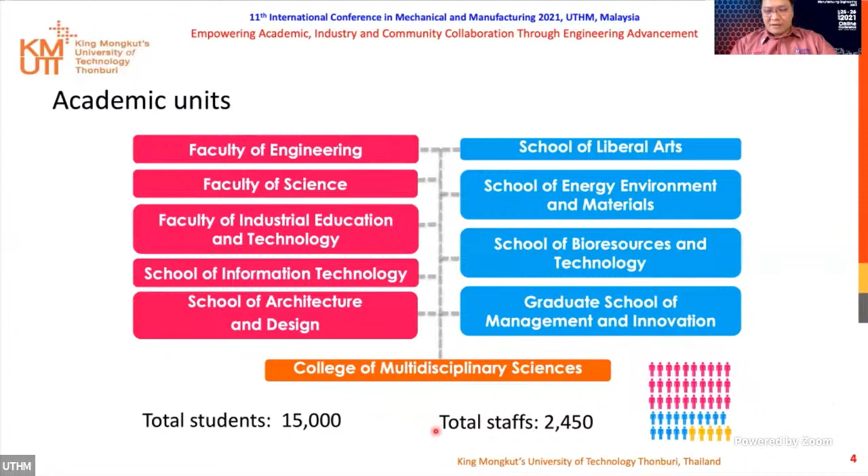Okay, then let me jump into the Faculty of Engineering. The Faculty of Engineering has our own vision: using engineering excellence to enhance society's capabilities. This is our strong commitment to serve the nation.

Within the faculty, we run the administrative office of the Dean together with three strategic centers to drive our mission. The Center of Active Learning in Engineering Education is taking care of the new teaching scheme. The Center of Promoting Research and Academic Outreach facilitates all of our academic staff and researchers to reach out and get funding from outside the university.

We are seriously focusing on international activity in our faculty. That's why we have one special center, the so-called ICE, International Center for Engineering, to take care of all those international activities.

We have a total of 229 staff, including 9 professors, 70 associate professors, 84 assistant professors, and 70 lecturers. The number of 163 researchers is also a very important workforce in our faculty.

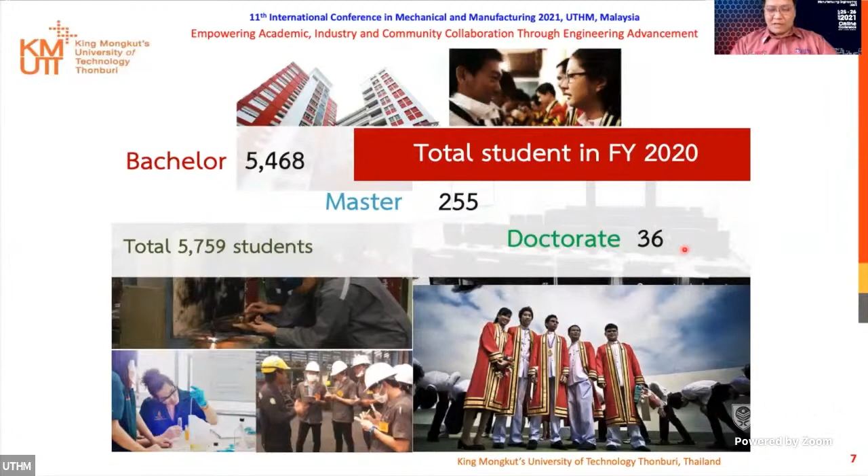This is the total number of our students in fiscal year 2020. We have more than 5,000 students. Most of them are bachelor students: 5,468 students, plus 255 master students and 36 doctoral students.

The most related resource to empowering academics to work with industry is strong collaboration. We have our own faculty-level MOUs directly with 45 companies. This is the work that I myself take care of, dealing with all those companies. We are planning to increase the number of MOUs by 10% every year.

For our nation, the government has specified 10 strategic trends of science and technology as our nation's issues. I believe we are sharing some interest between countries. For example, the next generation automotive, smart electronics, and aviation and logistics, robotics.

Today, my talk is related to this strategy. It's a medical hub. We've been going well with the work before COVID-19 exploded.

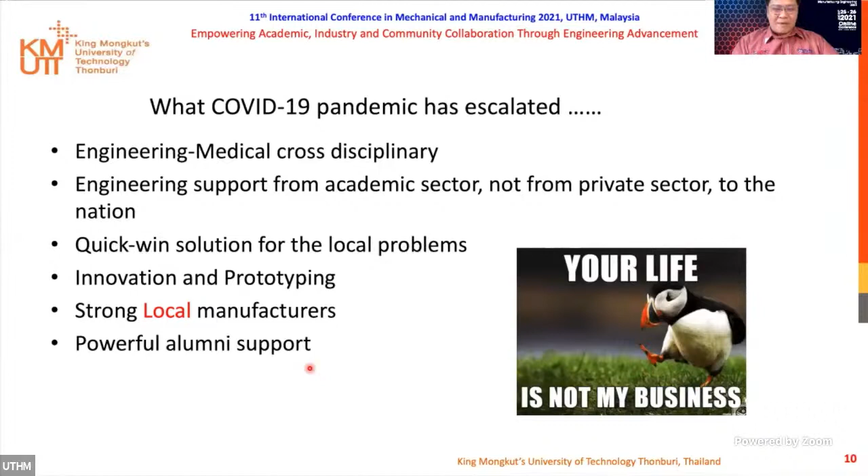As I said, you can try to look for help from overseas business in your country, but in our case, it's not really work. And unbelievably, one factor, powerful alumni support, is an important factor that maybe we don't think about.

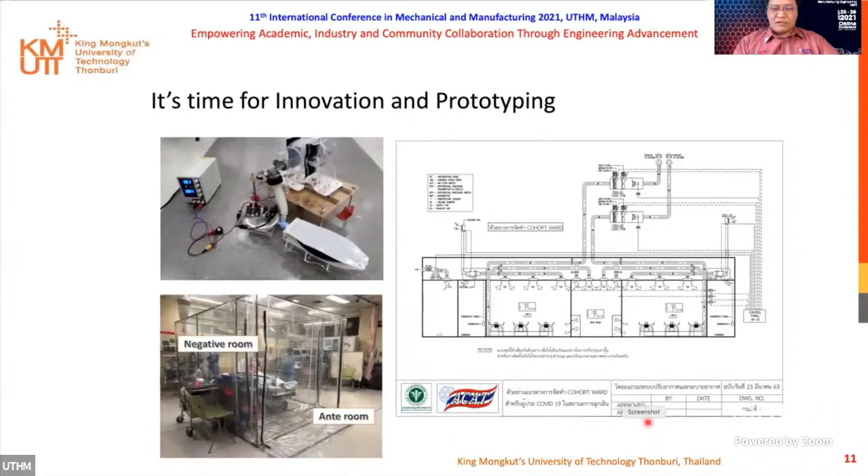In this slide, I just show you the development of the conceptual design of the cohort ward, that is KMUTT working closely with Saijo Denki. So we designed the concept of the urgent cohort ward. We did a review of the standard design, CDC, WHO, and NIH.

We also have the healthcare unit design standard in our nation. So the cohort ward should be negative pressure, and the airflow should be arranged in a specific directional airflow. The clean air should supply in the hallway where the nurse and doctor will walk along this path.

And the patient lying on the bed, at the head direction, we will have the exhaust system to suction the air, the dirty air, out of the room. And the mass flow and volume balance of the supply air and the exhaust air should be verified.

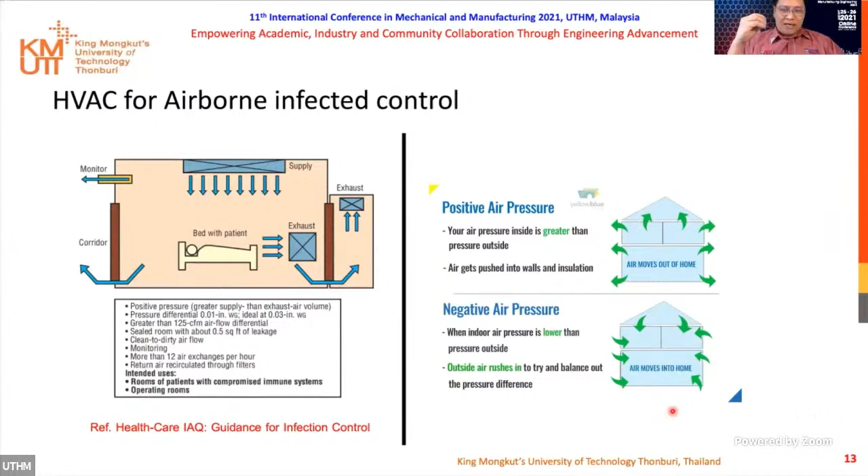So our design with Saijo Denki has actually been developed to renovate the urgent ward of the hospital. This is about the display of how we actually build, or renovate, the room in the hospital - we call it AIIR, the airborne infection isolation room.

So it should be fresh air 100%. It means no recirculation air. The new supply air will always be put into the room, and the exhaust air should be treated before letting out to the ambient - we treat it with the HEPA filter.

So the air change is one important key to dilute the concentration of the contaminant in the room. The directional airflow should be designed case by case. Actually, in our study, we need to survey the on-site first before we design the directional airflow.

The temperature control should be within 20 to 25 degrees Celsius, and the humidity control as shown in this diagram will be good for the condition that protects the growth of factors like bacteria, fungi, virus. So they recommend the humidity should be controlled within 40 to 60% relative humidity, and the pressure of the room should be negative, less than 2.5 Pascal.

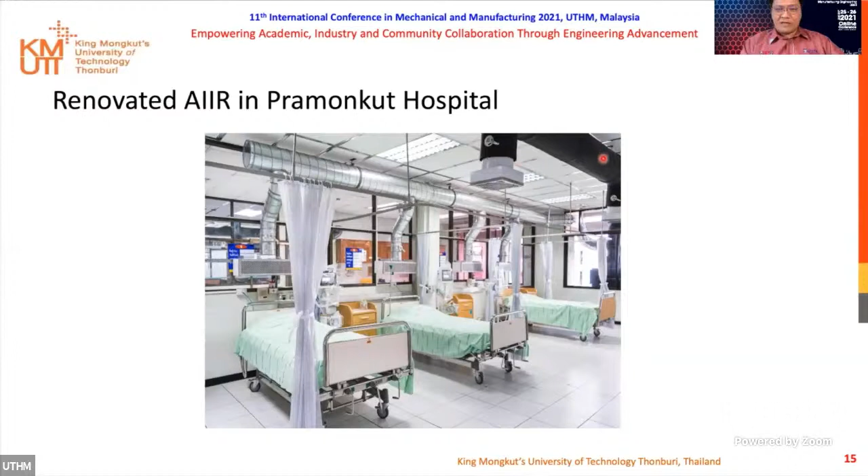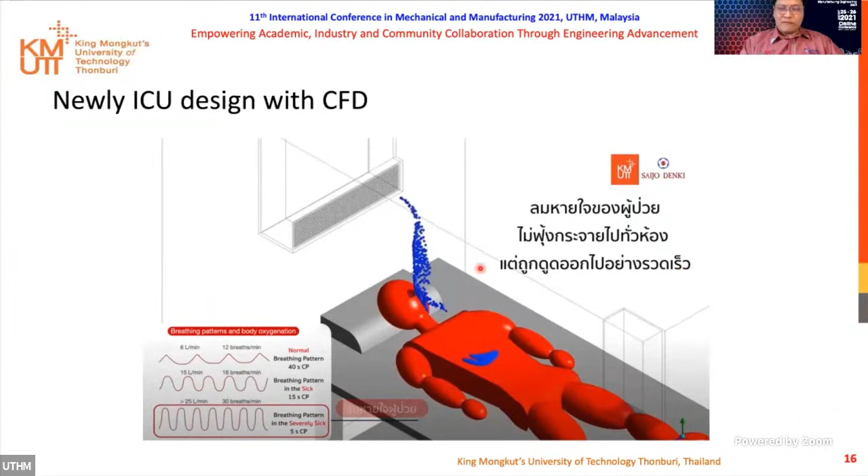So we then worked with the company, with KMUTT support, for the CFD computational fluid dynamic design to help the company design the new ICU. We also took parameters from the human breathing cycle to design how high and how large the exhaust plenum should be to efficiently remove airborne infection.

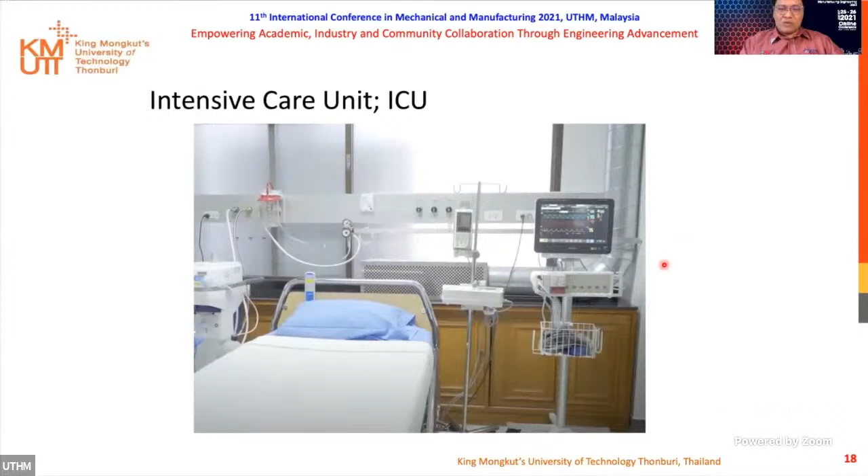Next, we moved to design and help the hospital renovate the OR room, the operation room. As I explained before, the operation room normally should be designed as a positive pressure room.

But in case the OR room is used for COVID-19 patients, negative pressure should be applied to protect the doctors and nurses working in the room, and also to protect against airborne infection escaping from inside the room. So we also used the CFD technique to help the company.

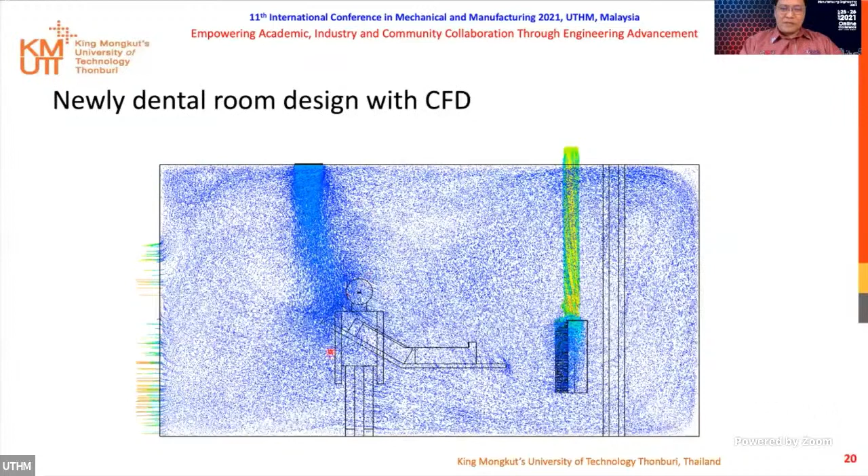We designed the dental room, because dental rooms normally generate a lot of aerosol. So in this case we used CFD to design the new directional airflow from clean to dirty. This is the exhaust ducting, this is the dental bed, and this figure represents the dentist.

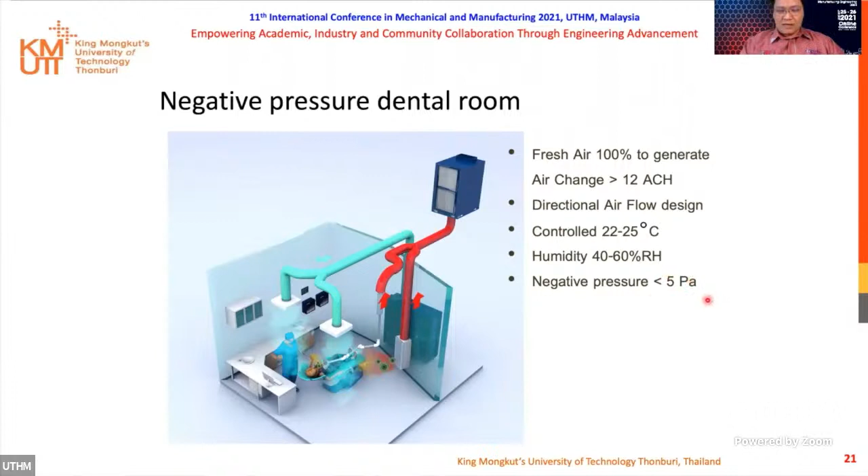For the negative pressure dental room, we need to apply a much higher air change rate than other rooms, because the dental room is normally very small, so we need a very high air change rate. Directional airflow again needs to be designed specifically using the modern CFD technique, and the negative pressure should be controlled at less than 5 Pascal.

This is the latest development this year, as the number of infected people in Thailand increased. We needed a modular ICU to be urgently built, so we collaborated with SCG, a very big company, to fabricate construction and building materials. They could design and construct a modular ICU for 10 beds within 7 to 10 days.

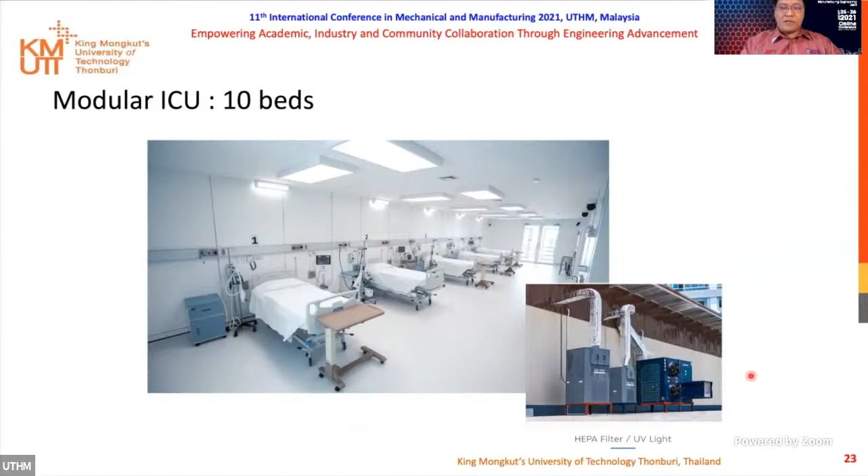This is much of our progress from June 2020 to 2021. We expanded more than 2,000 hospital beds in a year, renovated AIIR ICUs in 9 hospitals across the country, fully renovated 3 OR rooms from conventional to specifically applicable for COVID-19 patients, completed more than 100 negative pressure dental room renovations, have 8 hospital ongoing projects, and have already done 5 cross-disciplinary seminars between HVAC engineering design and real-case operation of healthcare units presented by medical doctors.

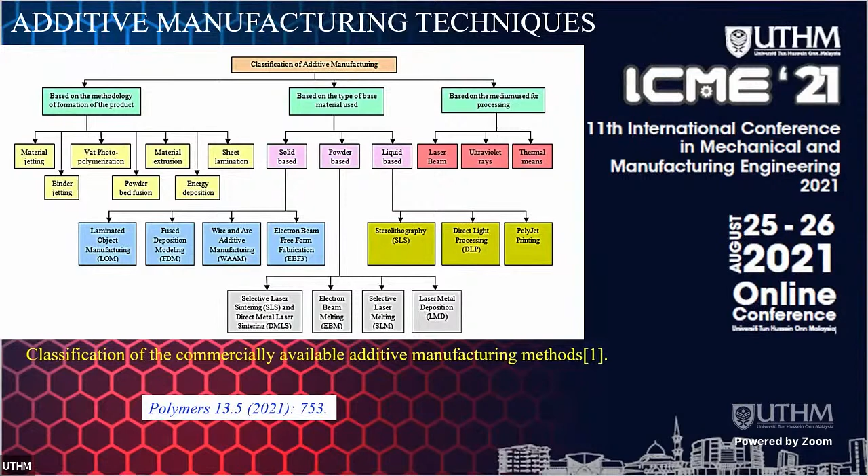The main companies in the global additive manufacturing market are as follows: Stratasys, 3D Systems, Arcam Group, Renishaw, ExOne, etc.

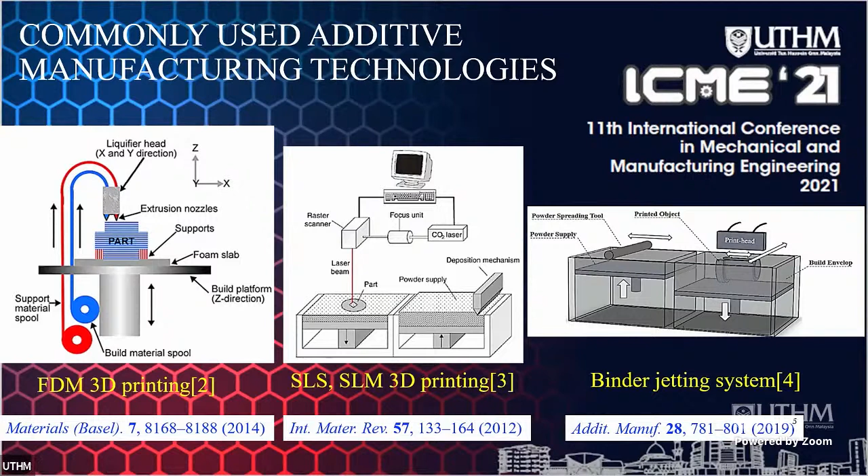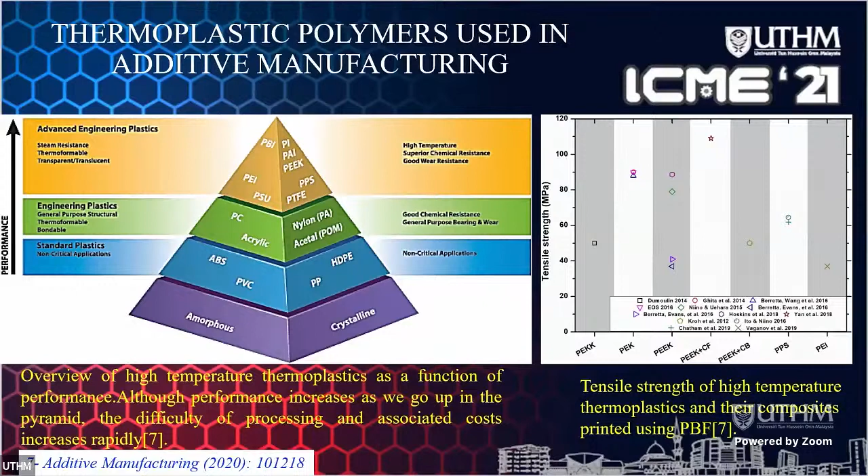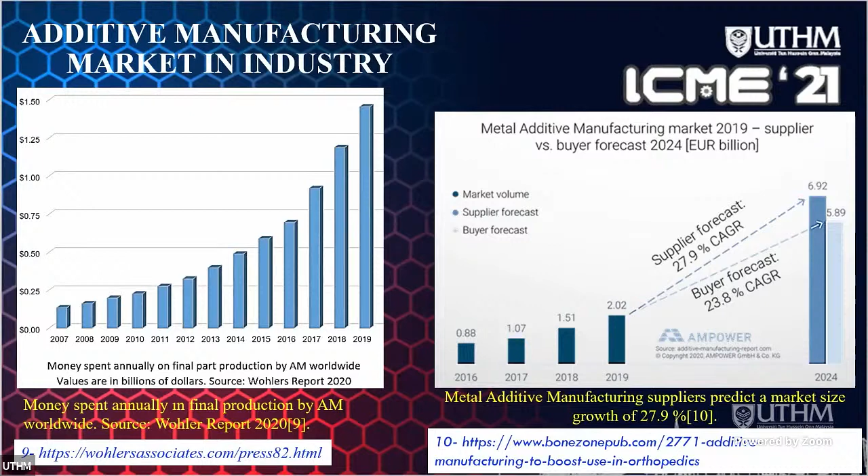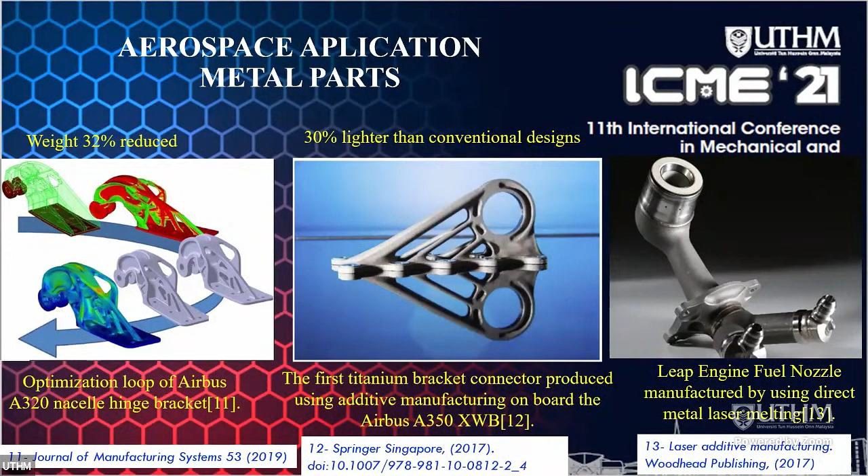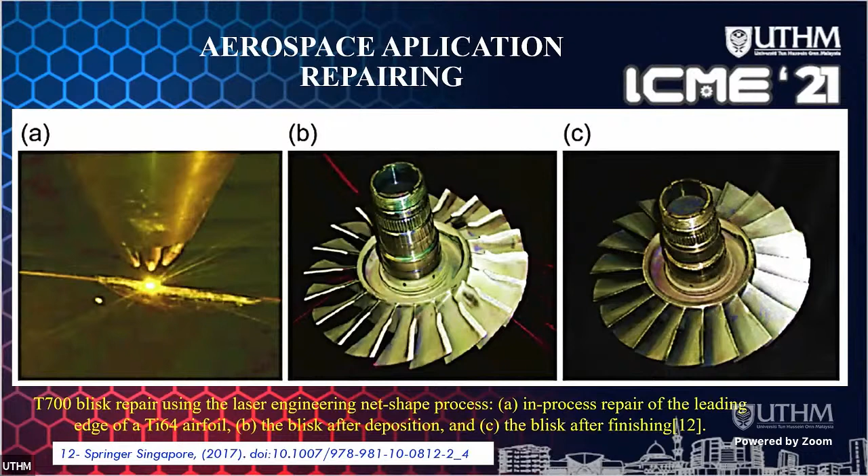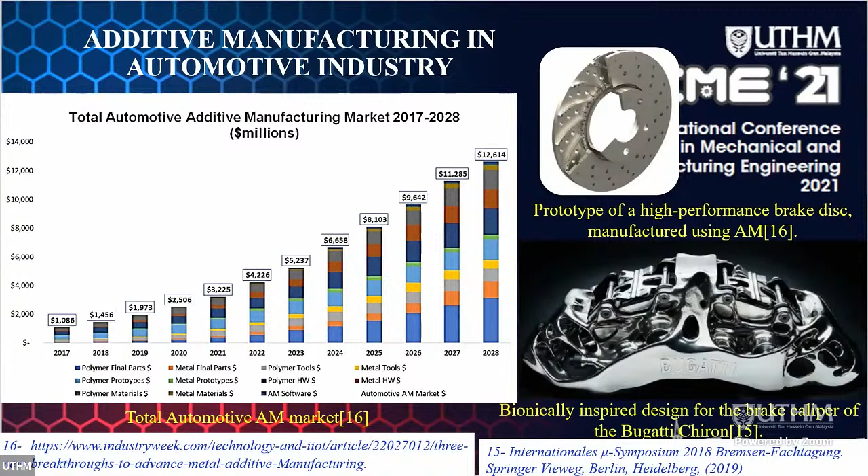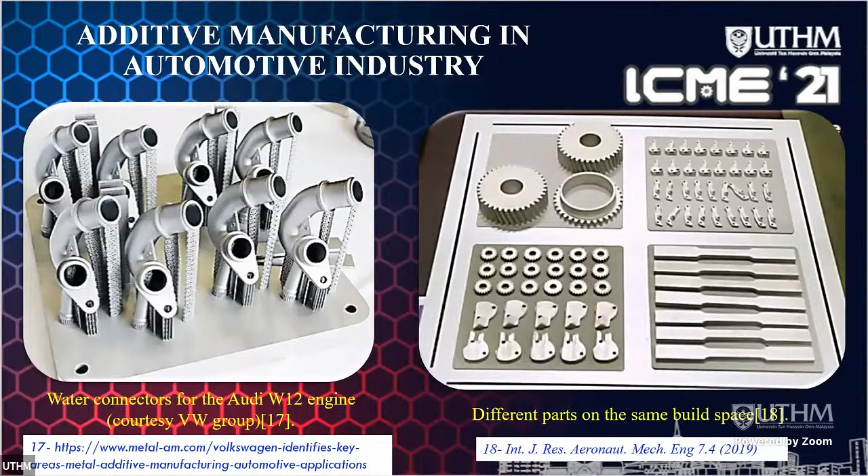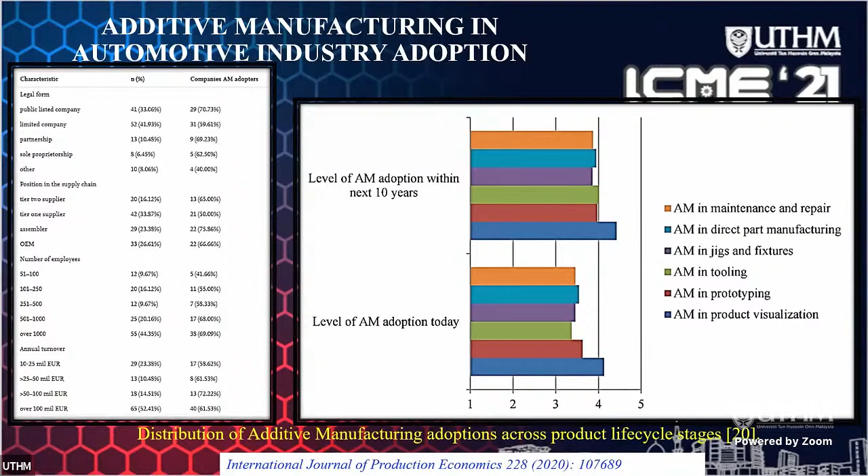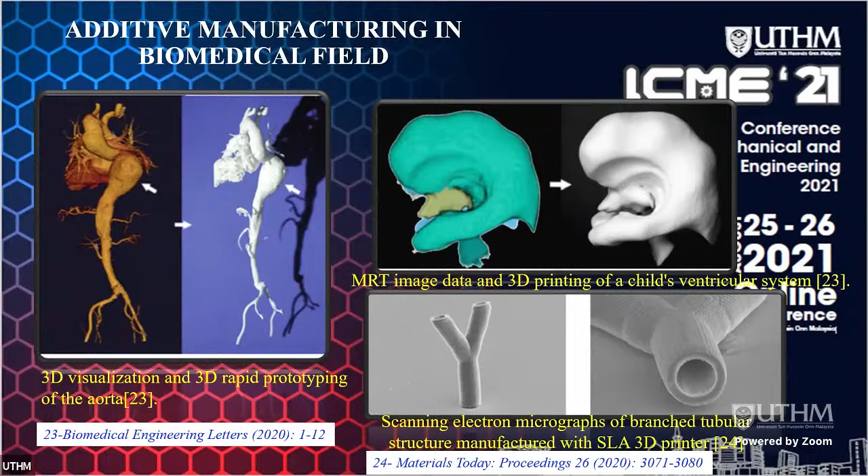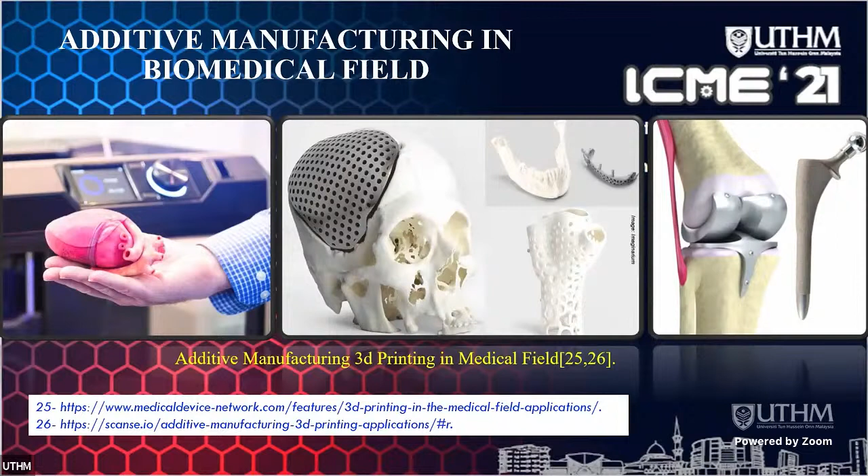This figure gives an idea of other industrial applications. The Eiffel Tower model produced from shape memory polymer material with 4D printer technology, and the shape memory stent model produced with a 4D printer are shown. In the second figure, the model produced by the traditional method, the model made of steel material, the additive manufacturing model, and the optimized additive manufacturing model are seen in the last figure.

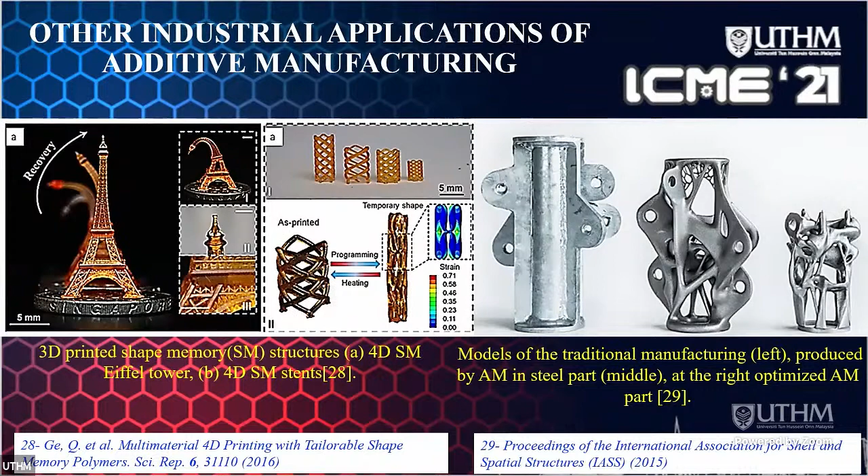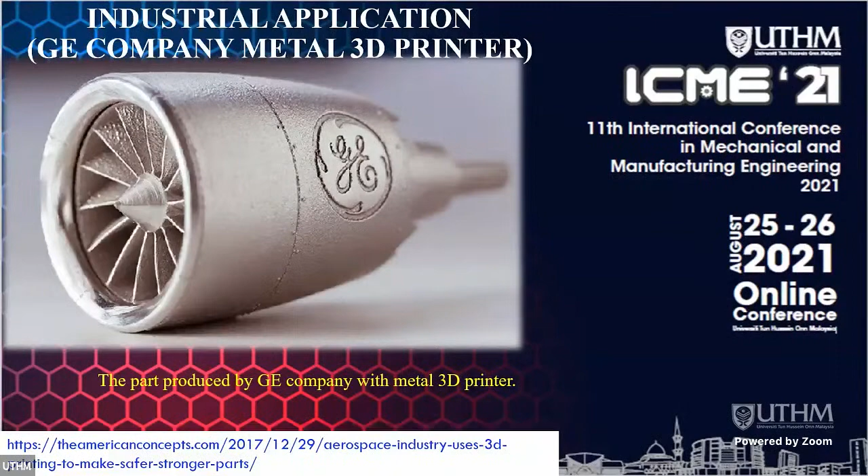In the animation, the part is produced by General Electric company with a metal 3D printer.

My conclusion is 3D printers use many types of materials such as polymer, ceramic, metals, and composites. Additive manufacturing techniques include FDM, SLS, SLM, 3D print, DED, LOM, etc.

Additive manufacturing technologies enable the production of parts with higher strength, lighter weight, and more complex geometry than traditional methods, especially in the aerospace industry. Another area where additive manufacturing technologies are widely used is biomedical applications. There are many applications in the biomedical area, such as hip, knee, or joint replacement prosthesis, artificial bone, and tissue applications.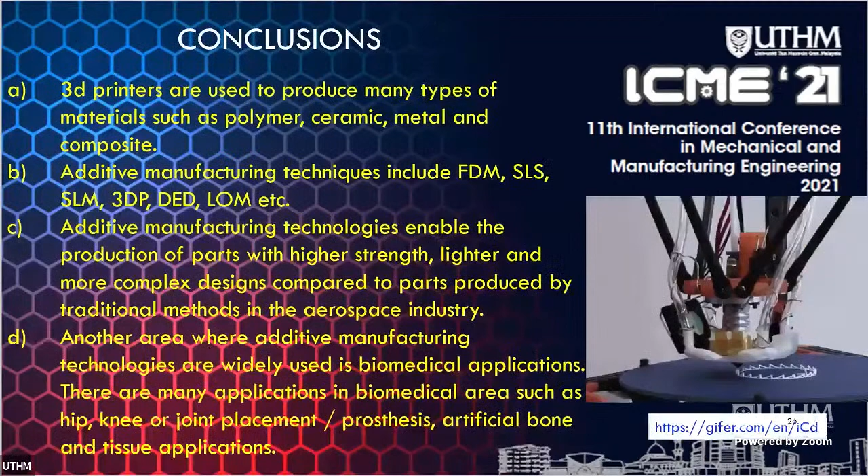In the automotive industry, additive manufacturing technologies are used in the development of niche products, prototyping, lightweight optimized parts, and spare parts.

Other application areas of additive manufacturing technologies include 3D printing of smart materials, the eyewear industry, electronic hardware, energy storage, food industry, sensors, and robotic applications.

Another application of additive manufacturing technology is in construction. The use of additive manufacturing technologies in the construction industry can reduce labor cost and material waste, and help produce customized complex parts that are difficult to produce with traditional methods, thanks to low prototyping costs and unlimited design capabilities. As a result of the work done, the weight of the entire structure can be reduced by 40%.

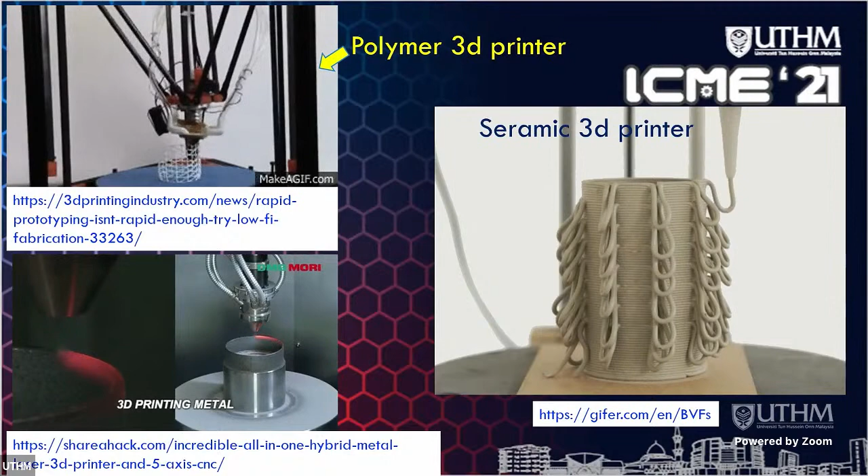My future outlook is that companies operating in additive manufacturing are leading the way in this field. But there are still new issues that need to be researched and developed, such as reducing machine cost, shortening production time, improving surface quality, and increasing measurement accuracy.

Binder jetting technology is seen as an opportunity, with significantly lower machine cost compared to other techniques, no size limit or a limit only to furnace dimensions, the ability to control strength values with heat treatment process, and being more sustainable on an industrial scale, etc.

Studies on optimization of weight with topology optimization, and the use of additive manufacturing technology in almost every field, show there are greater opportunities in new fields of activity. Thank you for listening.

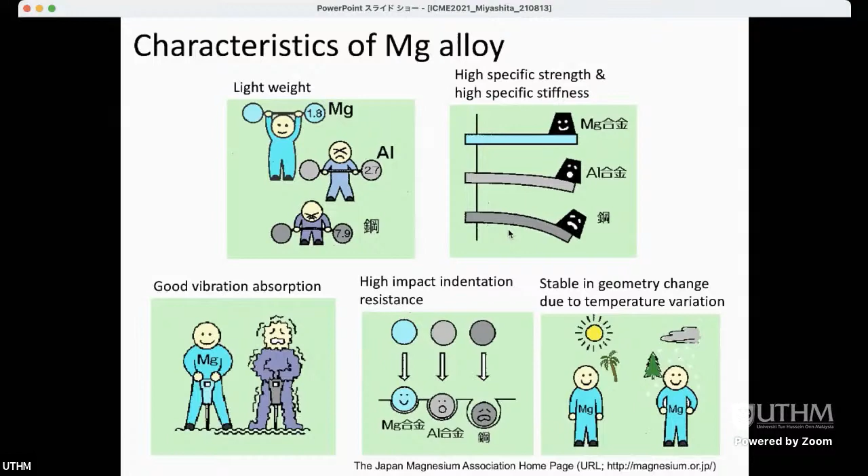However, every material has advantages and also disadvantages, and magnesium alloy too. One weak point of magnesium is poor workability, because magnesium has an HCP crystal structure, and in this structure the slip plane is quite limited. Another weak point is corrosion resistance.

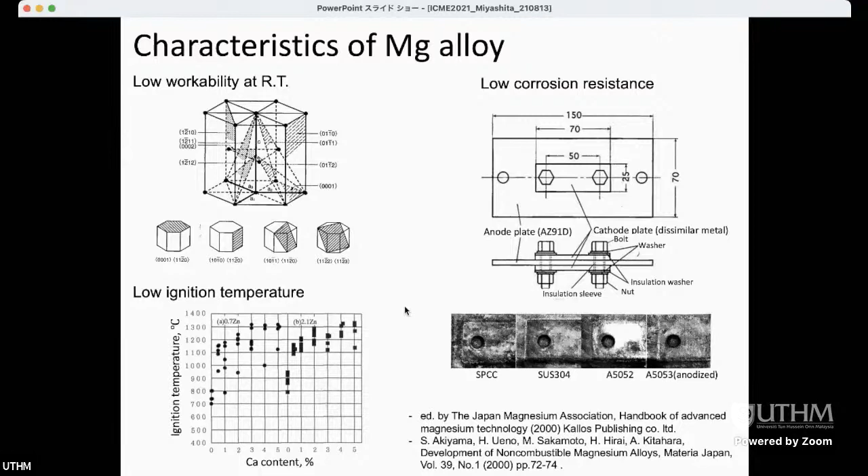However, recently new magnesium alloys have been developed, including calcium. When we add calcium, like more than 1%, we can increase the ignition point as shown in this figure. In the later part of this presentation, I will introduce this kind of calcium-content alloy, which is called non-combustible magnesium alloy.

This non-combustible magnesium alloy is now being developed in a national project. Of course, the application of this alloy is for large structures, like a train or car body. Generally, if you look at magnesium products, most of the cases that product is produced by casting, die cast.

But in the case where we want to make magnesium alloy for this kind of large structure, we need wrought materials. In this national project, wrought magnesium alloy is being developed, and I will introduce the results of this research work in a later part of my presentation today.

When we use extrusion material or roll material, such wrought material, we can avoid this kind of problem, I mean the cast defect. However, we needed to understand other specific characteristics in extruded material too.

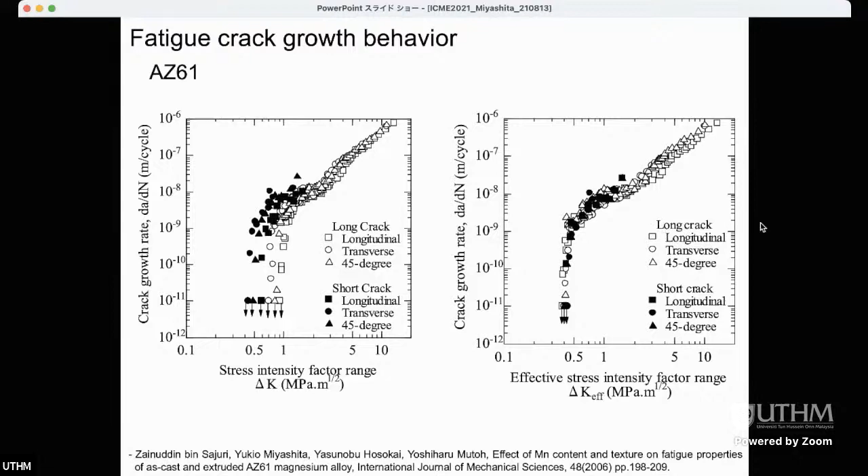But when we take into account the crack closure effect, we can get this single line. This fatigue crack growth curve is arranged by the effective stress intensity factor range, meaning the crack closure effect is taken into account. So this difference in fatigue crack growth resistance is mainly due to the difference in crack closure behavior in different materials, and that induces a difference in fatigue strength.

So I move to the next topic: effect of environment. We carried out a test in different temperature and different relative humidity conditions. The temperature changed at 20 and 50 degrees centigrade. In this case, we couldn't clearly recognize effects of temperature. However, we could recognize a quite significant effect of humidity in this test.

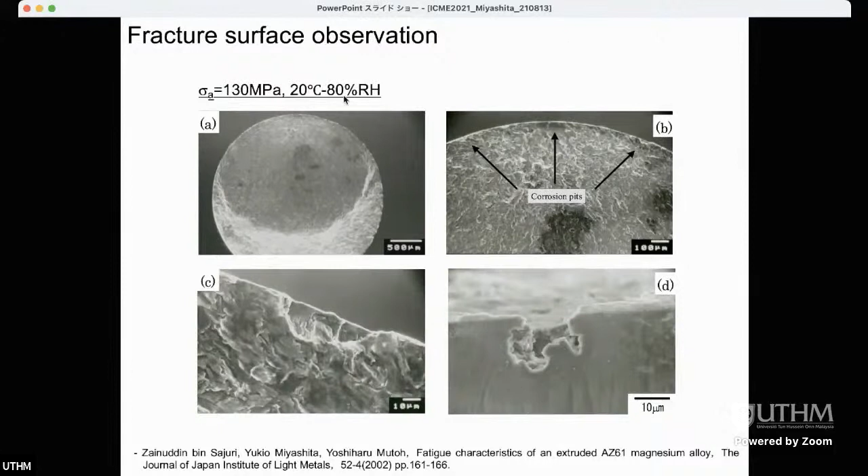However, when we just keep the specimen at high humidity condition but without cyclic loading, we couldn't observe formation of corrosion pit. So that means both mechanical loading, cyclic loading, and corrosion environment induce the corrosion pit. So this is the corrosion fatigue mechanism.

And after the pit grows to some size, fatigue crack starts to initiate from the corrosion pit like this. So first the corrosion pit initiates, and the size of the corrosion pit increases, and then the crack starts to initiate from this corrosion pit.

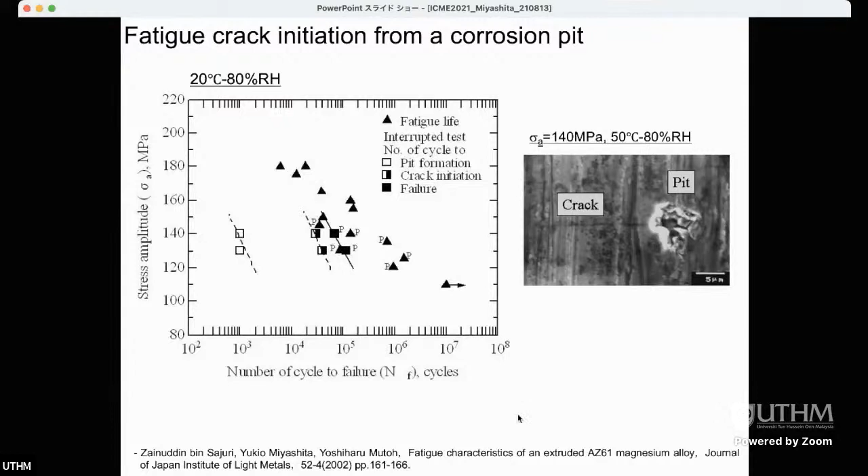Okay, I move to the last topic: effect of aluminum content in non-combustible magnesium alloy. As I explained in the introduction, we need to develop a wrought alloy if we want to apply magnesium alloy to large structures. In that case, of course, we need a large size of magnesium alloy.

But because magnesium has quite low formability, if we make extrusion material with high speed, sometimes we have cracking problems. However, if we reduce the alloy element, we can make extrusion material with high speed.

However, as I already mentioned in the introduction, mechanical property depends on the alloy element. So if we reduce the alloy element, basically mechanical property also decreases. So we needed to make a balance between mechanical property and workability, I mean the extrusion ability.

Another problem, as I already introduced to you, is that in some cases we can observe inclusions at the fracture origin. In this paper, they observed calcium oxide at the fracture origin as an inclusion.

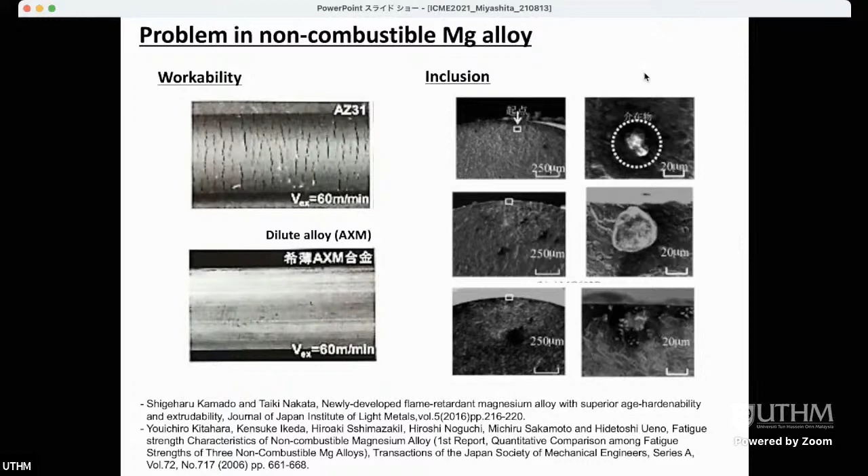As I already said, the mechanical property and fatigue strength depend on the aluminum content. However, in case of the alloy with high aluminum content, we can recognize this kind of inclusion on the fracture surface, but not in the alloy with low aluminum content.

In case the alloy includes quite high aluminum content, fatigue crack started to initiate from the inclusion. This figure is a kind of SN curve, but arranged by the stress intensity factor.

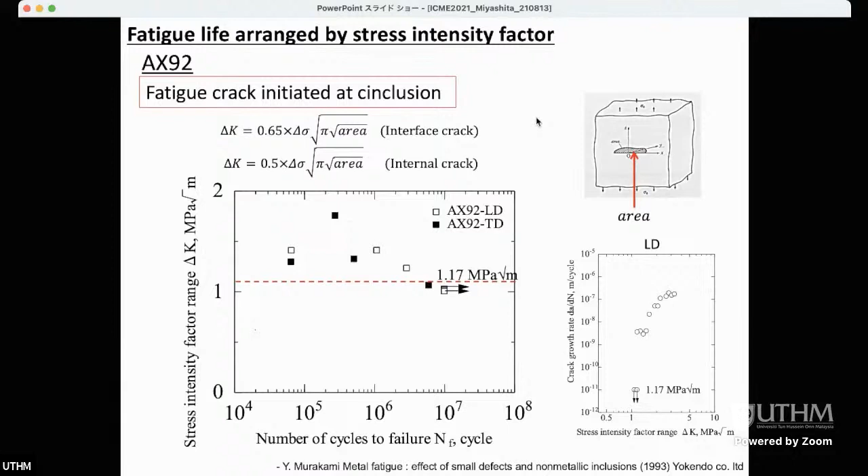This dashed line is showing the threshold value. Below this line, specimens were not broken at 10 to 7 cycles. Fatigue strength data were arranged by the stress intensity factor, as you can see from this figure. That means fracture mechanics approach is quite effective to understand the fatigue characteristics of this kind of alloy.

Next, we try to predict fatigue strength based on the fracture mechanics approach. So we start from this equation. We want to calculate fatigue strength, and in this case we need a value of delta K threshold and crack size, meaning inclusion size, because we assume that the crack always initiated from inclusion.

And in order to predict this inclusion size, we predict it based on extreme value statistics proposed by Professor Murakami at Kyushu University. And also for calculation of delta K threshold, we use the crack closure model. So in order to obtain this delta K threshold value, we need to obtain another parameter, as you can see from this equation.

So effective threshold value is almost 0.5 according to the reference, so we can assume 0.5 in this calculation. And delta sigma is applied stress, so we can change it, of course, and we need to obtain this delta sigma effective stress range.

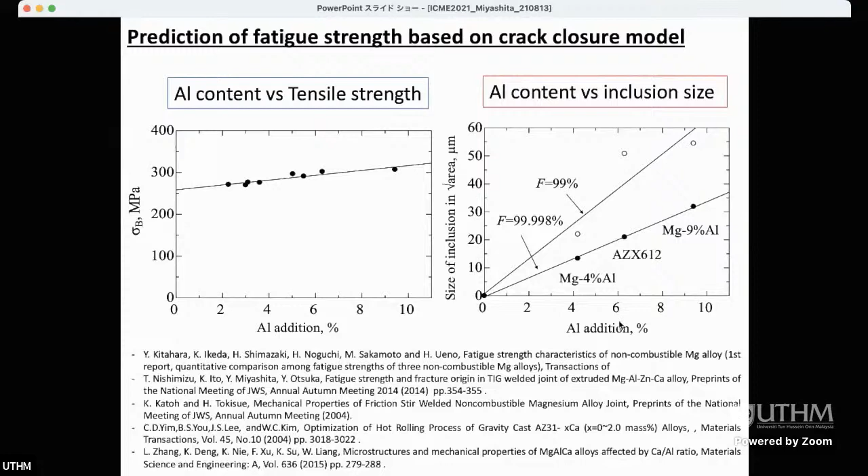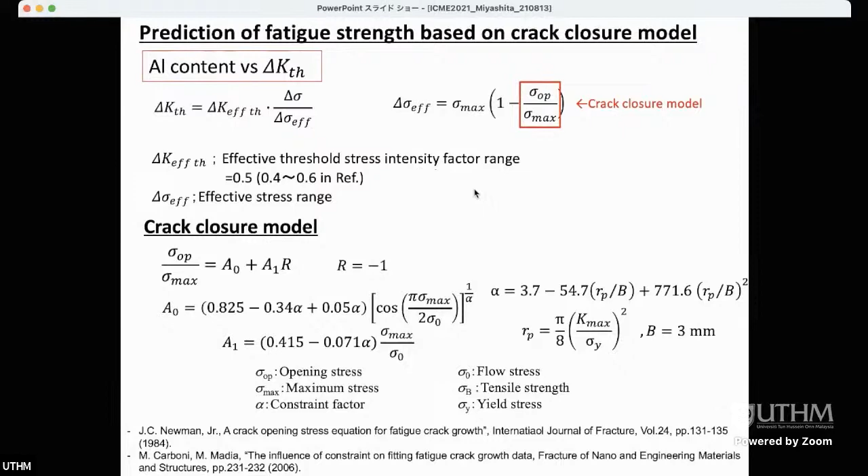And also we can predict the size of inclusion from this figure. This figure is showing the relation between inclusion size and aluminum content. So by using this figure and this experimental result and the equation based on the crack closure model, we predicted the fatigue strength ratio.

And when we check the fatigue strength ratio reported in previous papers, most of the cases report that value was 0.4, so that means our prediction is quite reasonable.

So according to this kind of calculation, we can predict the fatigue strength of the material, and also understand aluminum addition. As I said, we need to consider making a balance between mechanical property and inclusion size or workability. So this kind of prediction is quite useful to consider those kinds of things, and could be good for fatigue design and also alloy development.

Okay, this is a summary of my presentation today. First, I explained the basic and fundamental fatigue property of extruded material. Next, very important in practical use, the environmental effect on fatigue characteristics of magnesium alloy. And third, the effect of aluminum content in non-combustible magnesium alloy, where we propose some prediction methods of fatigue strength of magnesium alloy.

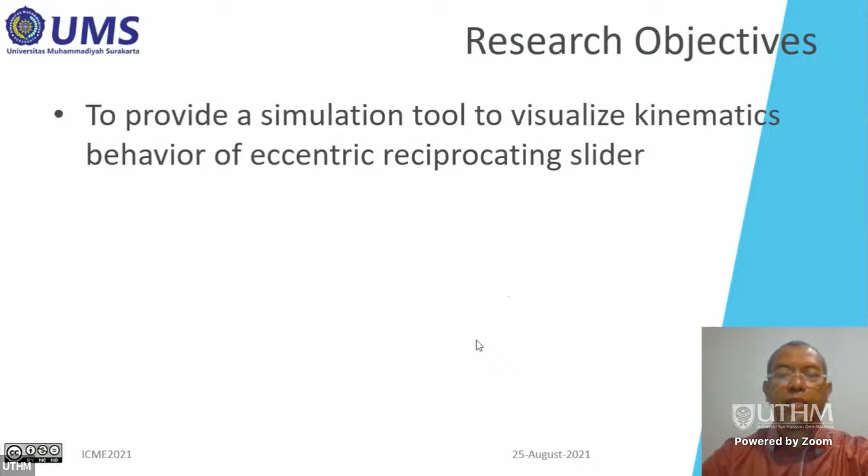Now we start from the research objectives. The first one is to provide a simulation tool to visualize kinematic behavior of the eccentric reciprocating slider. The developed tool is expected as a reprogrammable platform, enabling users to customize and modify for design optimization of reciprocating sliders.

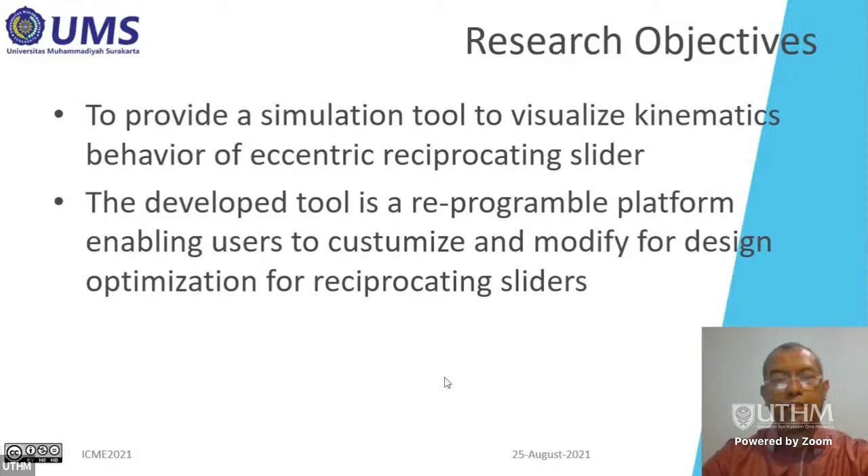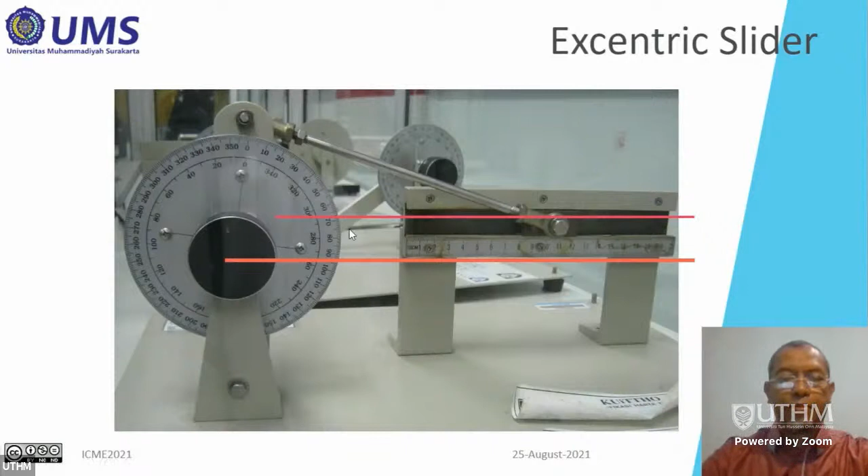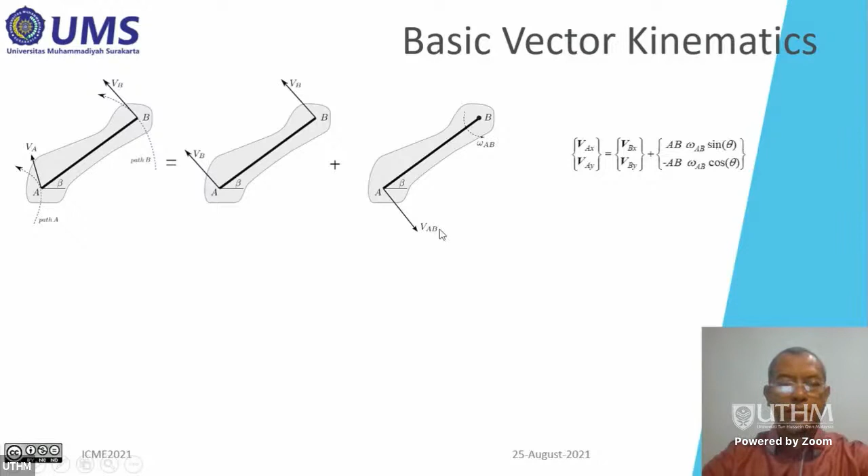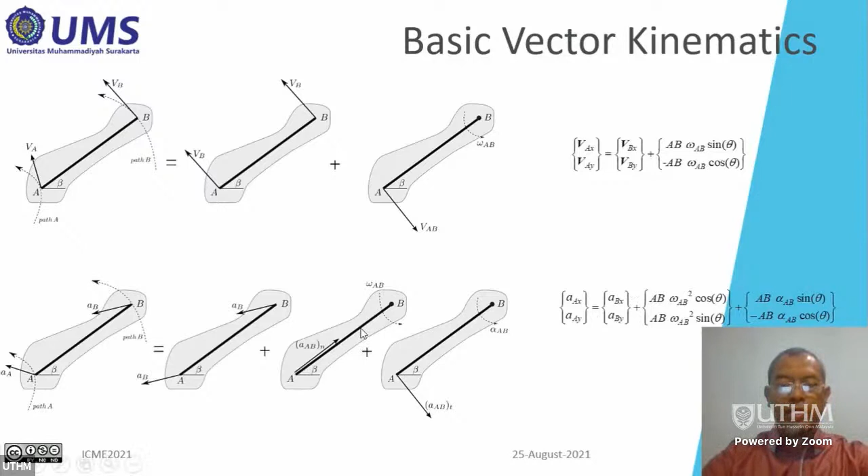From the analysis of vector kinematics, it starts from a very simple consideration, which is that general motion consists of translation and rotation. This is the velocity diagram, and the equation consists of the translation and tangential rotation parts. For the acceleration, it's the same: it consists of the translation, and the rotation, which consists of two parts — the normal rotation and the tangential rotation.

For the implementation in SMATH, the position of the slider is represented by X, the velocity of the slider by VC, and the acceleration of the slider by AC, all written in terms of theta, EC, AB, and BC. So all these design parameters are written simultaneously as functions of position, velocity, and acceleration — all kinematic variables are defined simultaneously for the design parameters.

For the platform design of the simulation tool, the design consists of several working areas — actually three working areas, and three snippet steps. The snippet steps are the equations or programs coded in SMATH, and this coding can be hidden or open according to requirement. If we want to show the program to our students, we can open the snippet, and then students can learn how to do the program, and if they want, they can customize and modify the programs to make it better or to add more parameters for their research.

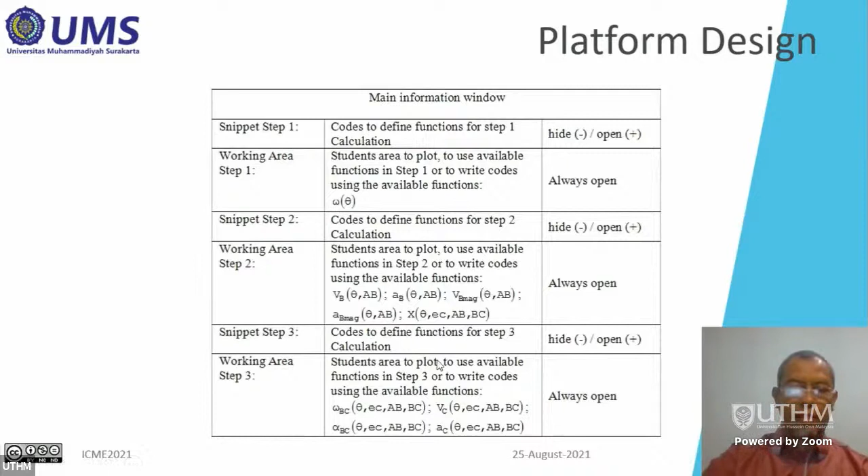And snippet number 3 is the most complex one. All kinematic variables are written in 4 design parameters altogether. Then the working area step number 3 is the most complicated, and it can be used for some other applications.

So this is the input data, this is the coding snippet. If we click this button, it will close this snippet, then the user cannot see at all. So what they see is only the input data and the results only.

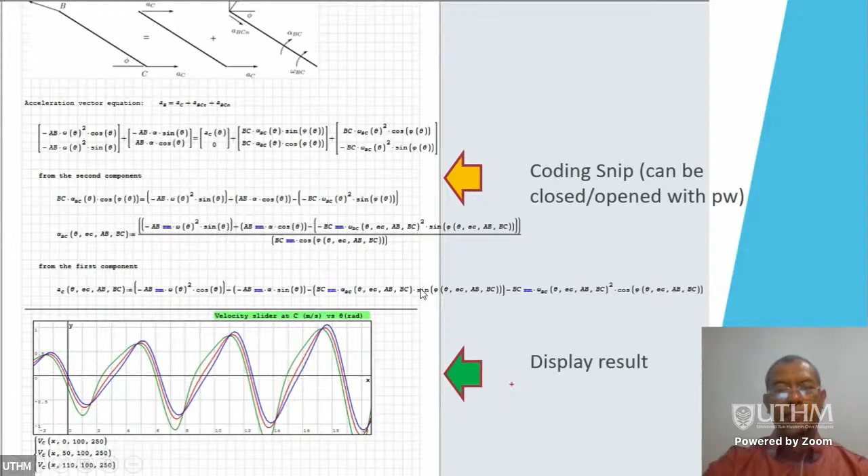Now, we go to the applications. So the first application is the kinematic investigation of eccentric reciprocating slider mechanism. This is the investigation of the eccentricity involvement towards the velocity and acceleration.

If you want to see different eccentricity and then see the result variables of the velocity and acceleration, then you can plot the graphical results whenever you put different input data in terms of the parameter.

The second one is you can show the graphical kinematic behavior not only numerically but also graphically, at least one complete cycle. So you want to see the behavior of the slider, you cannot only see one single location only, but you have to see the whole cycle, at least one cycle.

And the third one, in the case of the rotation of the crank, whenever it's not constant but increasing, then observing the first cycle would not provide sufficient information, because you have to see some more cycles, since the angular velocity is increasing. Therefore, the behavior of the first cycle will be different from the next cycle.

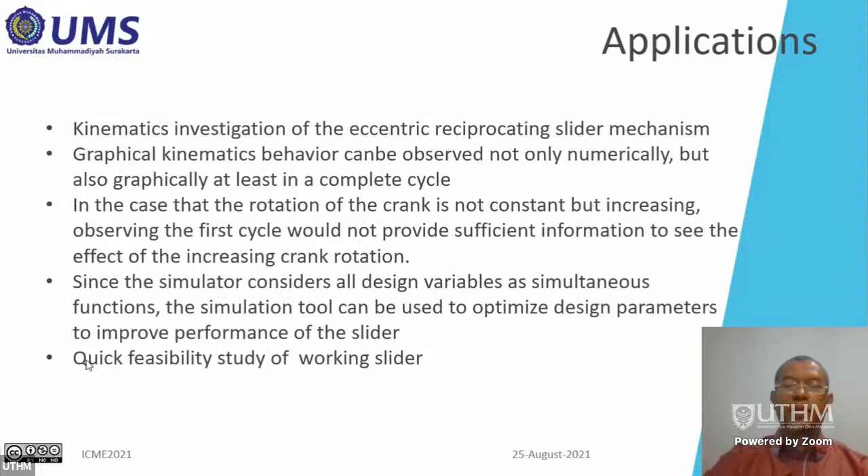This is the illustration of the results of the tool you can use for simultaneous comparison of different parameters. For example, x is the variable, and the second argument here is the eccentricity, the third is the crank length, and the fourth is the length of the connecting rod.

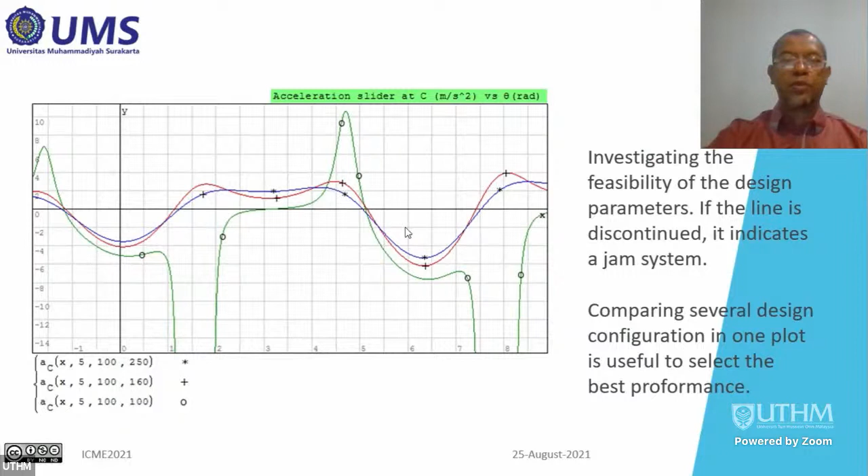The calculated variables can also be written as multiple functions depending on the design parameters. For example, the acceleration consists of several parameters at the same time. As shown in the previous slide, the parameters altogether considered are 4 - every variable consists of 4 parameters - and you can configure the form as you wish and see the results when you run the simulation tool.